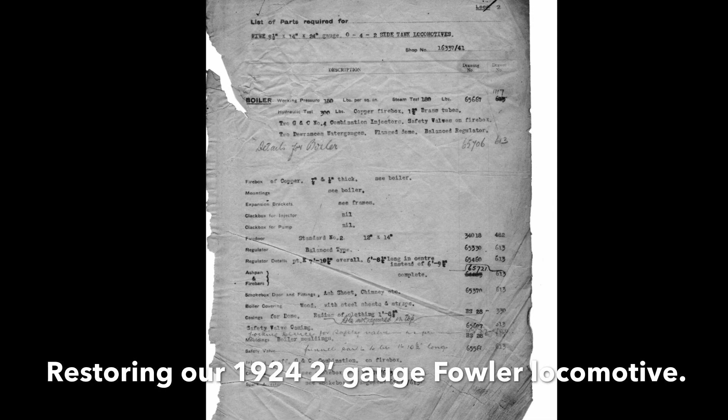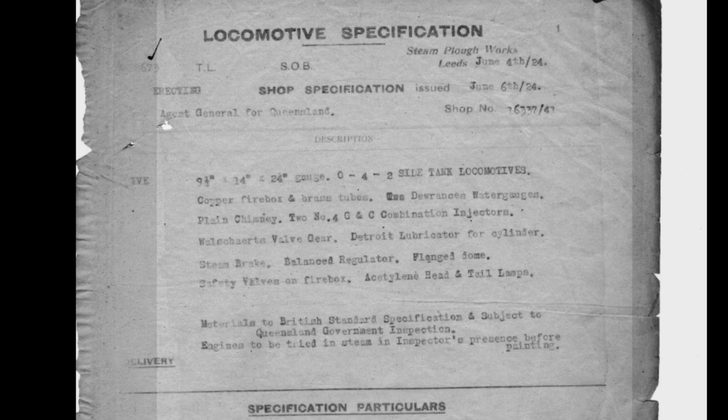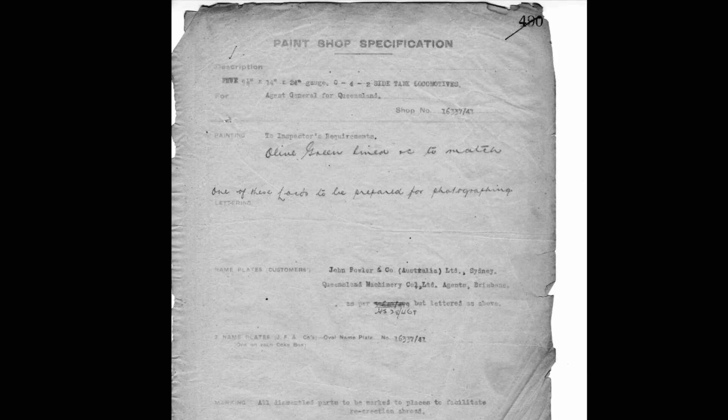These are really interesting - the original job spec sheets for our locomotive from the Fowler factory. You can see on the right hand side the batch number 16337 to 41, the batch of 5 locos for Tully Sugar Mill. It shows the order placed by the Agent General for Queensland on June 4th, 1924, and they're full of fascinating details - it says olive green lined to match, and one of these locos was to be prepared for photography, which we've seen with the works photograph of Tully number 2.

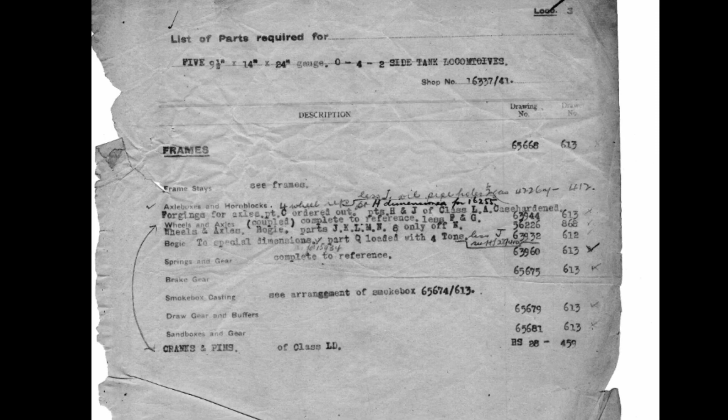They're an amazing find, kindly sent to us by Jonathan Palterman, who, when the Fowler factory was being demolished, went along with a friend in a van and loaded it up with all the stuff that would have been lost to history had they not made that effort.

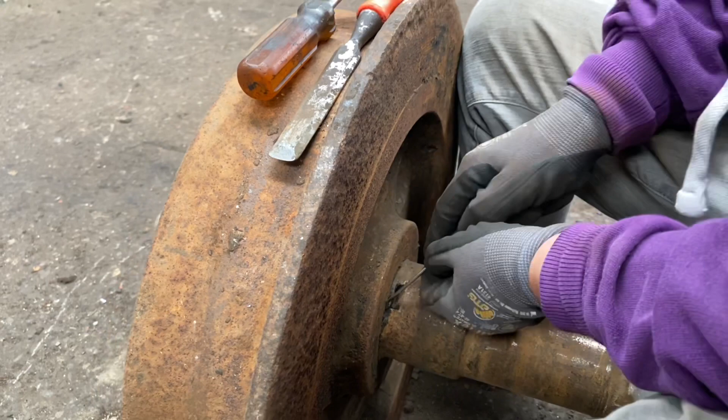The numbers on the right-hand side are the specific drawing numbers we used on our locomotives, so we know exactly how each part was made. The handwritten notes are from the actual workshop floor, showing what they did differently and why, on our individual loco. An invaluable part of its history, and we're really grateful to have received it.

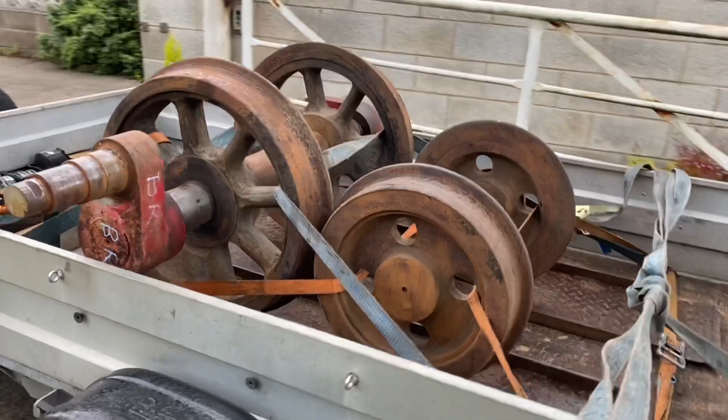So moving on to the engine, here's Jenny cleaning up the wheel sets, ready to go off to CMS Cepcor, essentially Bagley's Engineering as it's now called, where they've got much bigger lathes and much bigger kit than us to deal with them.

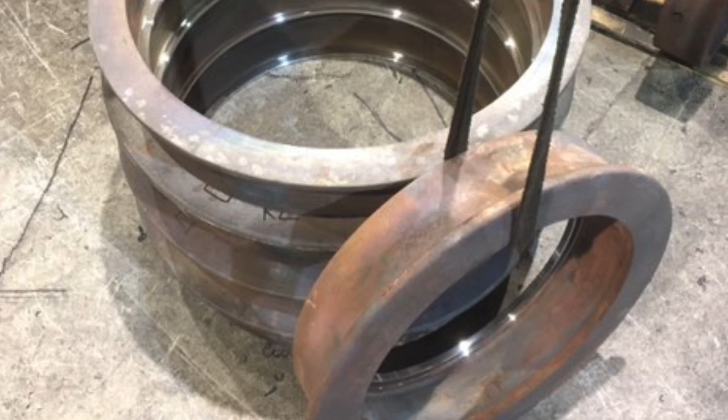The tyres were pressed off with a massive hydraulic ram to get them off the wheels for machining, as you can see here. They pressed off the fly cranks too - it took 120 tonnes to push these fly cranks off the end of our axle, quite a force we couldn't have done ourselves.

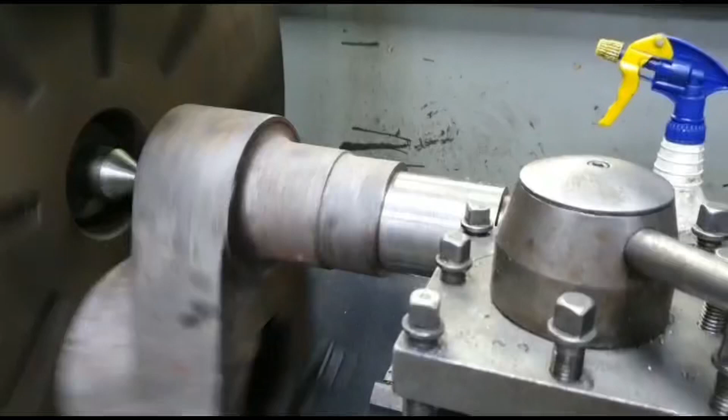You can see it balanced here on the lathe, with the crank pin running a little eccentrically - that's just because of wear on the actual pin. It's centralised properly, and we're machining it down, getting them all ready to go back on the engine. We'll send them back down to Setcorp, who will press them back onto the axles for us.

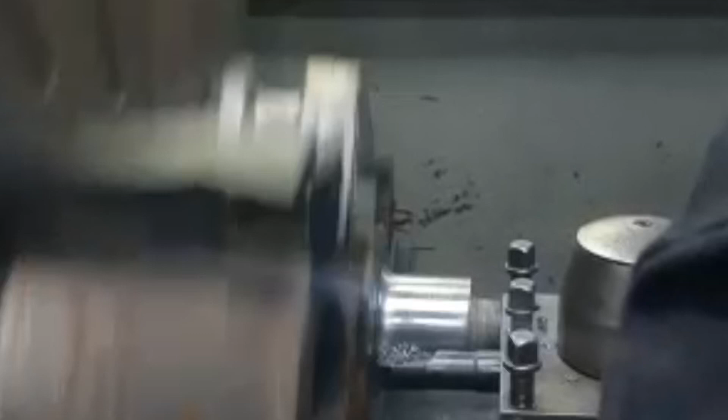We've got quite a lot of machine tools at the steam workshop, but some things are just a little too big for us to comfortably handle. Here's the fly cranks all ready to go back down to be pressed back on the axles again.

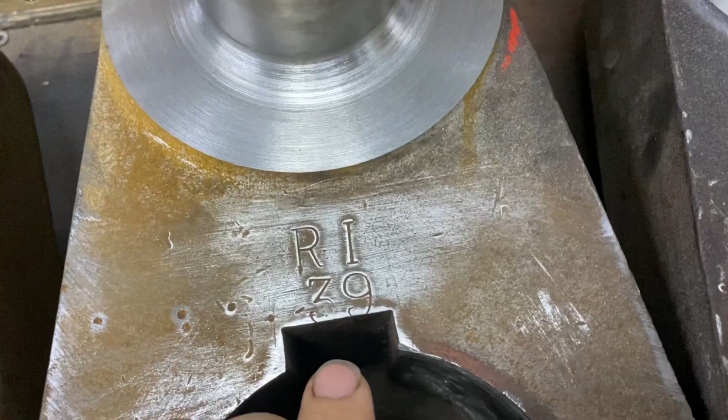Interestingly, they're marked up with 39 - that's 16339, which is Tully number 2, not Tully number 5. So they're not off our locomotive, they're off one of the others from the batch. The longer pins are obviously the driving crank axle, and the shorter ones are the coupled wheels, the front set.

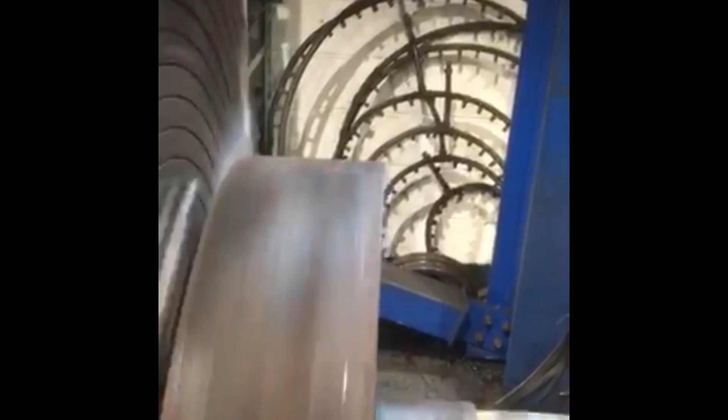The trailing pony truck here on the big lathe is clearly running very out of true - it's got a bent axle, as you can see. We've decided to treat that by skimming everything down to make everything square, so the only part of the wheel set that won't be true is the actual cast spokes. We don't think that'll have a significant impact on anything being out of balance.

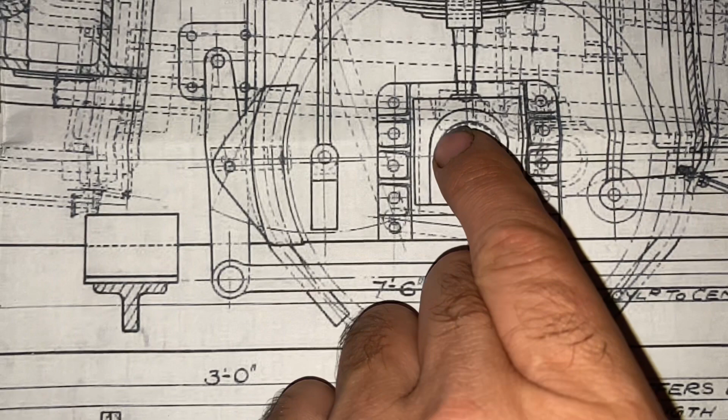Moving on now to the axle boxes in which the axle you've just seen runs. They're 3-part axle boxes - you can see the bottom part that holds the oil, the top part that retains the structure, and then there's a bronze shell that goes over the top that the axle actually bears upon.

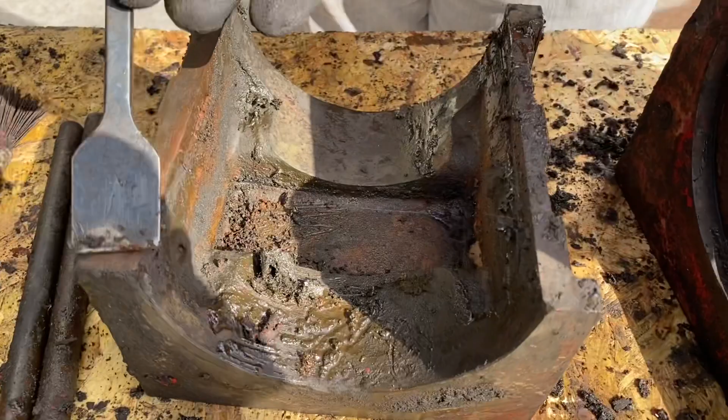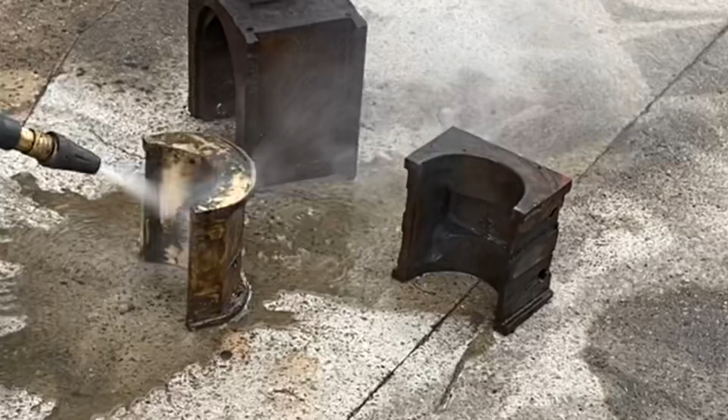In the real world they look like this. You can see Jenny cleaning the years of muck off the bottom part that holds the oil. The main part is there with the slippers on the side for the horn guides, which we'll come to later, and there's the bronze shell. We then cleaned all the muck off so we could see the wood for the trees, so we can make assessments on what we need to repair.

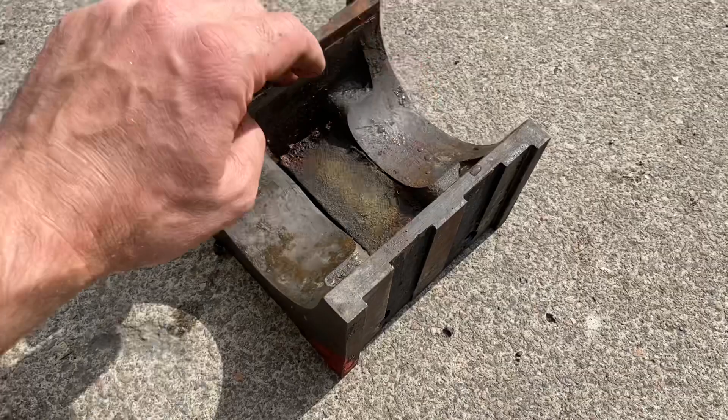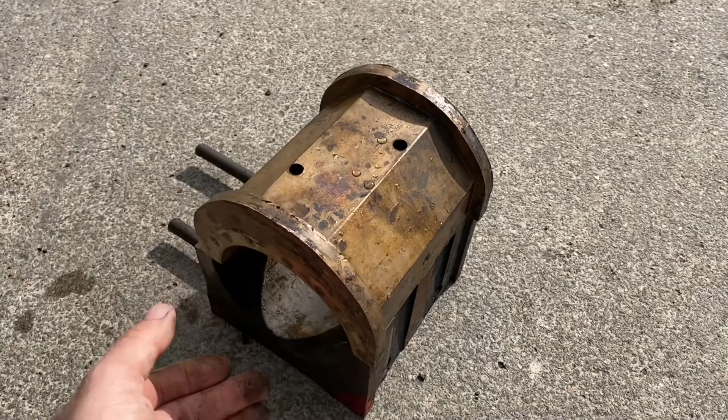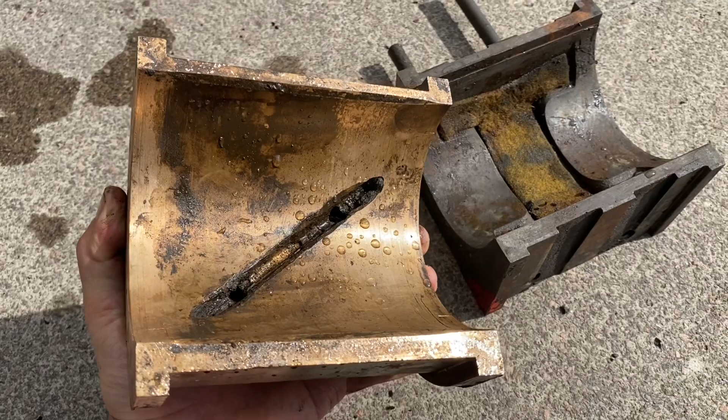The oil retainer at the bottom is like this - it has a space for a felt that holds the bulk of the oil, and another felt that sits up in an arch and touches the underside of the axle, keeping oil smeared on the axle as it rotates. The bronze then sits over the top, and the axle bears upon that. At the top there are 2 holes which, when the axle box sits over the top, allow oil to filter through from the reservoirs into the slot and onto the axle itself, to make sure it's continually lubricated.

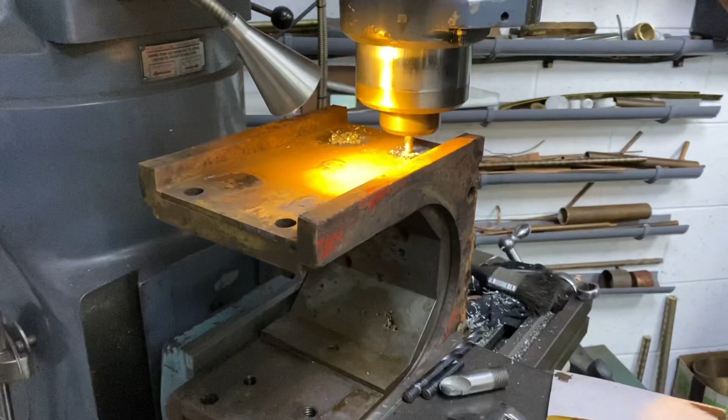Now, at some point the axle boxes themselves have got so worn at Tully Sugar Mill in the horn guides that they've needed extra pieces of metal put in there to build them out again.

That's what you can see there. They're all worn and pitted as well, so we're removing them. We're having to drill out the countersunk screws that are holding them in, because they were so rusted in that we couldn't shift them any other way.

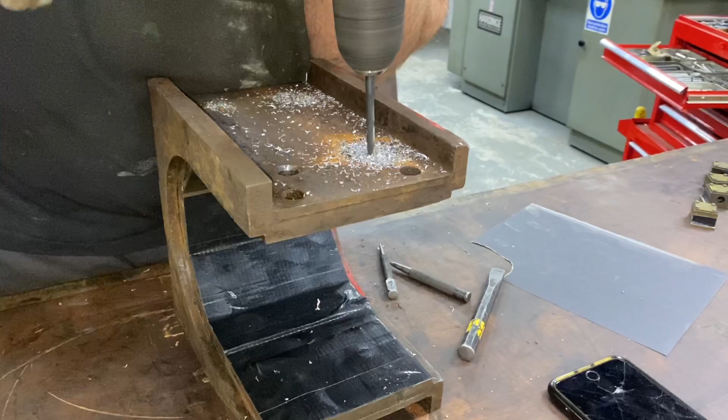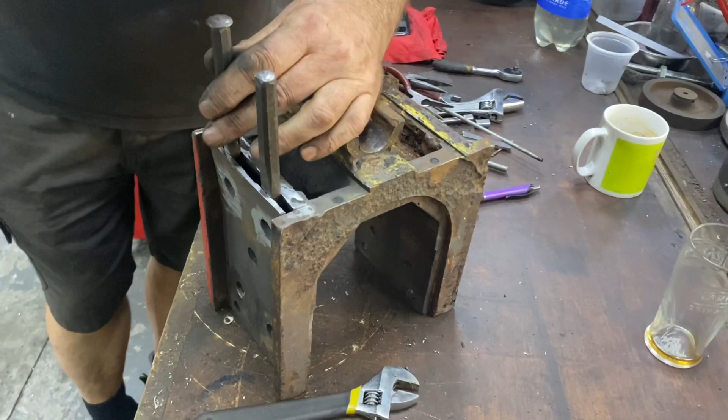So we're drilling through the screws in this bit of film, and then we're going to prise and pull that part of metal off so that we can make brand new ones, which will be oversized, and then machine those pieces back down to fit exactly where we want them in the new horn guides. You can also see here the surface of the axle box is incredibly pitted.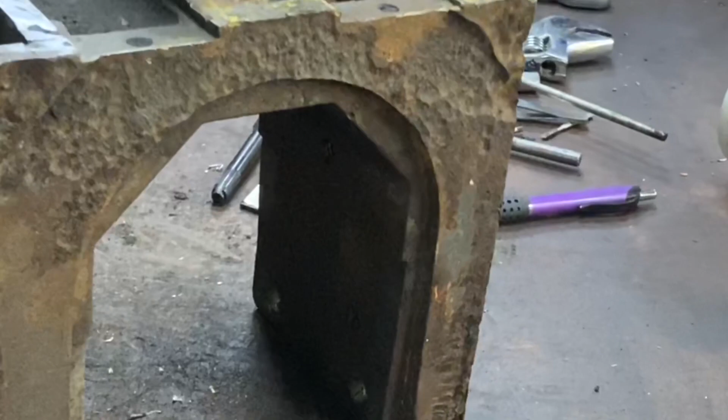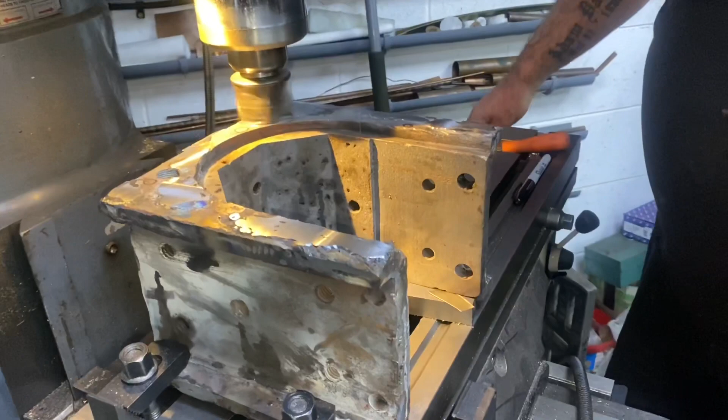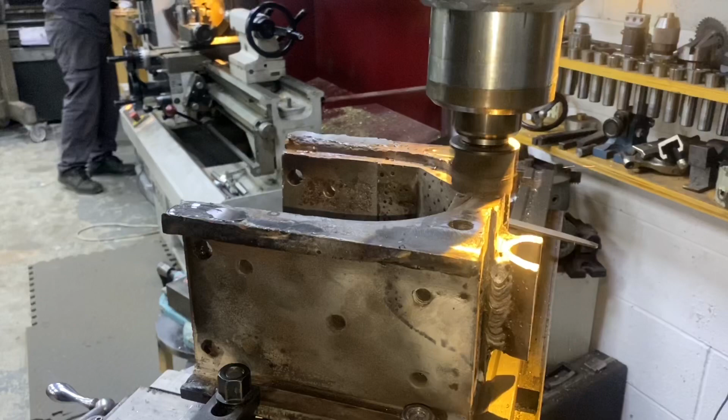It's a steel box, but it's all rusted away. We don't want to use new boxes, we wanted to use the original parts. So we've filled all of that rust and deterioration with weld. We've welded it up so it's an oversized surface, and then here we're milling it back to the correct size with the milling machine, to get it back to a fresh, perfect surface to the drawings of what it should actually be, and what it would have been before the rust and the wear.

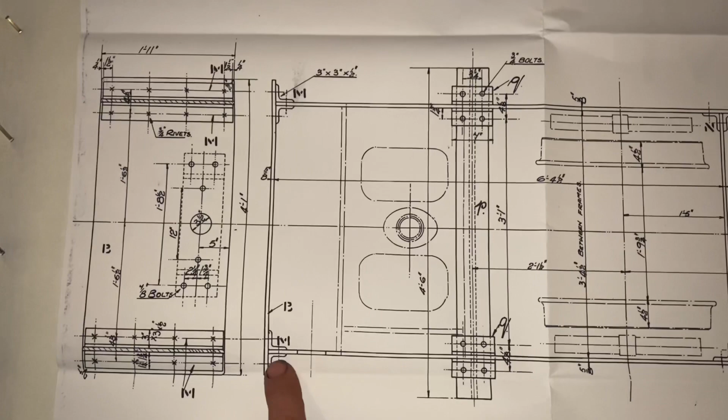Moving on to the frames, this is an interesting part of the project. That's the front buffer beam. And the line that I'm tracing with my finger now shows where we've found a big kink in the frames. On the right hand side, this is the plan view looking down from the top, and on the left hand side. The loco's obviously had a very heavy front end impact at some point in its life, and it's really bent the frames. You can see that line I traced on the drawing there with the black line down it.

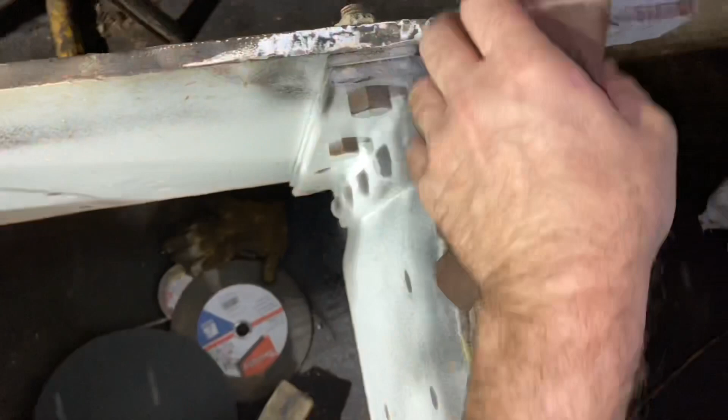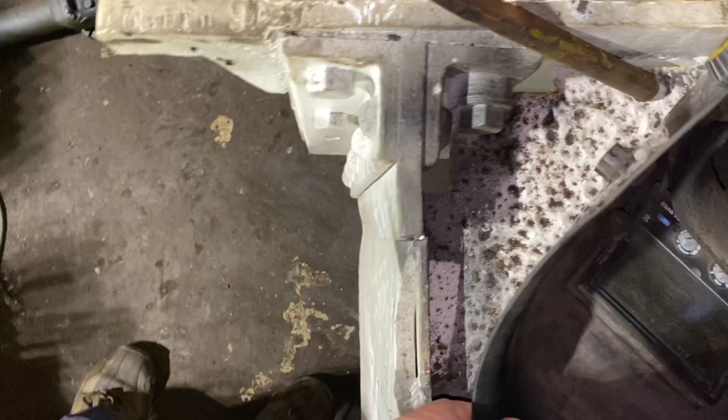And when we go over and look down from the top, once I move the glove, you'll be able to see that it's very badly kinked over to the right hand side. We obviously need them to be straight. Same story on the left hand side here, and you can see that there's quite a thick wedge in behind the front buffer beam and the angles of where it's all bent.

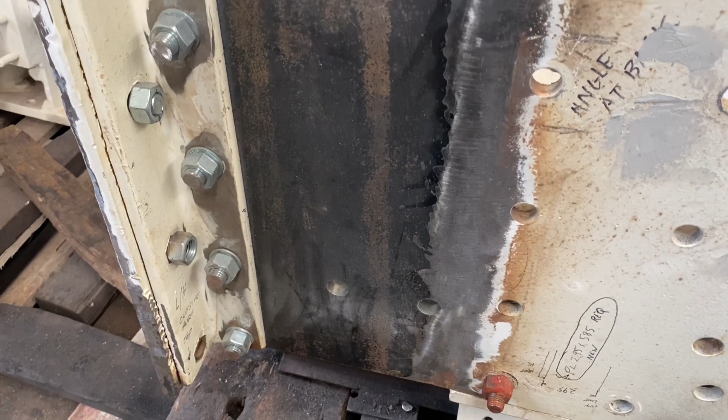We needed to chop that section out along those lines and weld in, as you see here, a brand new section of plate at the front end. We did consider heating it up and putting long arms on it to try and bend it square, but ultimately we decided that would be quite a difficult thing to practically achieve in the real world, and this was the most sensible solution.

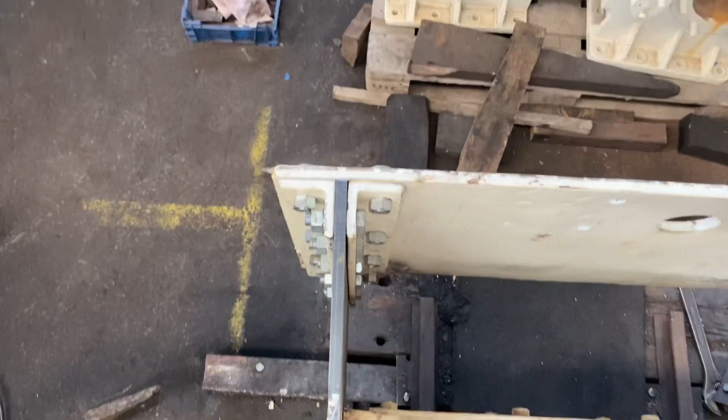Looking from the top, you can see it's now much squarer, although we've still got some work to do there on straightening the buffer beam itself and the angles.

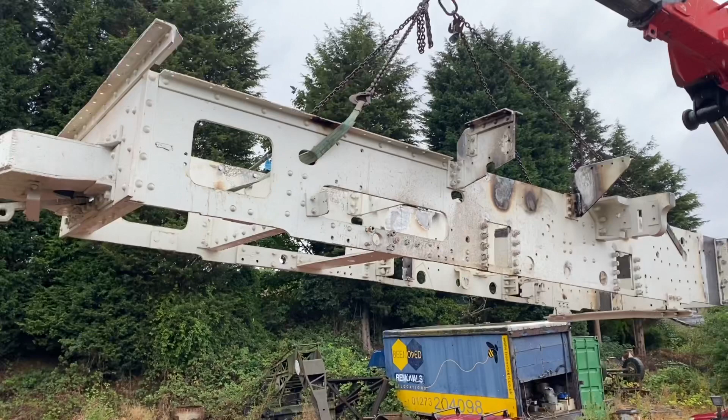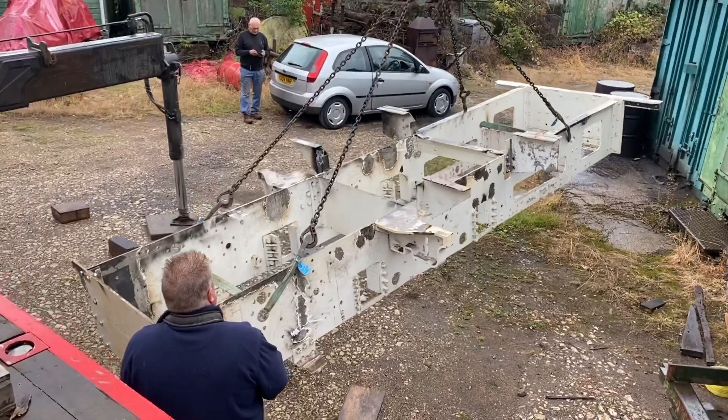This is the frames now returning back from the welders and the fabricators and the shot blasters, ultimately back to the workshop, where we can really start to get them set up and sort everything ready for the wheel sets and axle boxes to go back in again. They look a bit scruffy because of all the welding work and repair work that's been done to them.

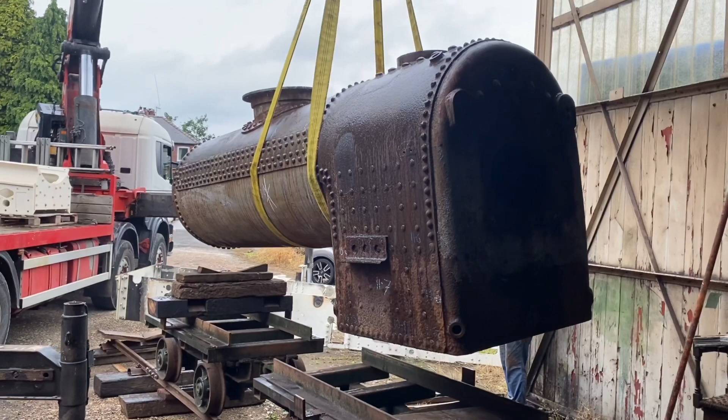The boiler, then, now empty of its tubes, as you've seen in a previous video, was loaded up onto the same lorry and taken away for shot blasting, so that that too is clean metal, and we can see the wood for the trees and get a professional boiler inspector in to assess it and give us his view.

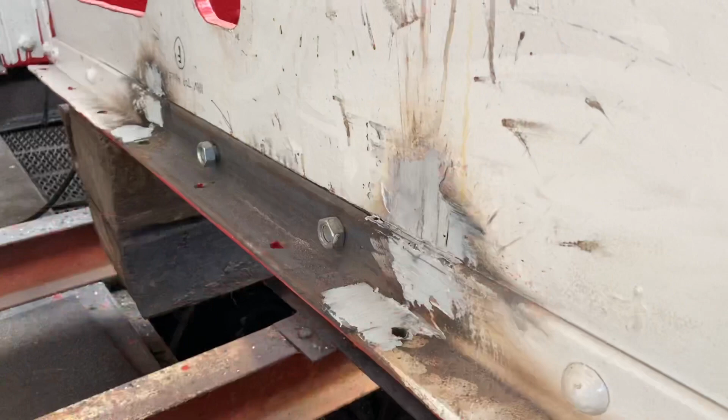This is the frames in the workshop, and we've started to replace materials. There was a badly rusted part of angle iron there which we've chopped out, and the same here, replaced with new where and when we've had to, retaining the original when we've been able to.

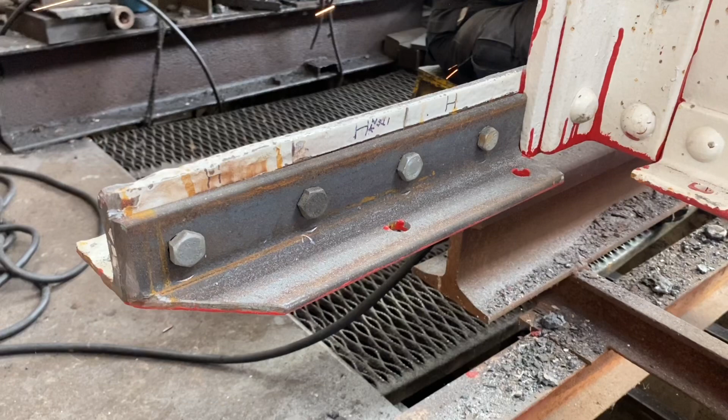Here, this is the rear buffer beam. You can see it's very badly pitted, and again our approach has been to fill those pits with weld to build up that surface and replace it with new material.

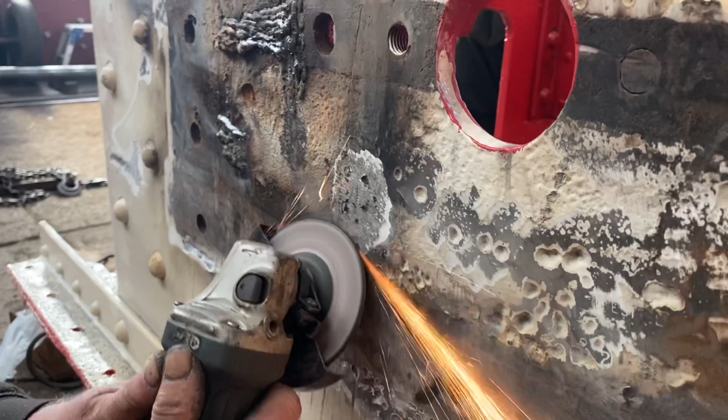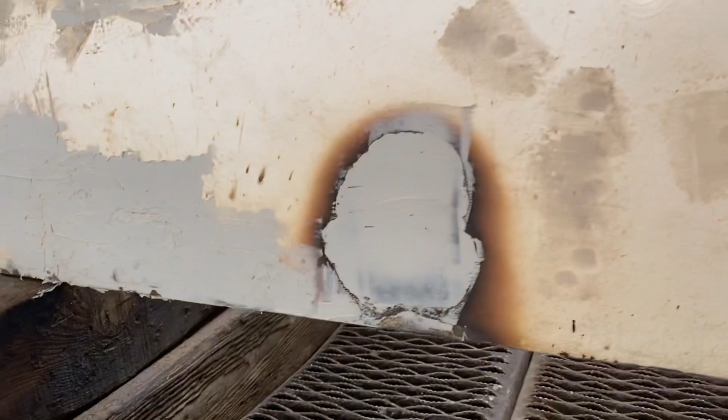The welding isn't brilliant, but it's going to get angle ground off anyway, back to flat metal. That's what Dave's doing here, angle grinding off my rubbish welds to get it back to a nice smooth finish. The little bits of pitting left can then be filled with filler or paint and sanded back. We're not looking for a beautifully glass smooth finish here because it's a 100-year-old steam locomotive, but what we don't want is a weakness in the material where it's thinned to a point that causes structural problems.

Here you can see where the cracks have been welded, and from the cracks in the horn guides, they've been welded up, sanded back, and then filled to make them smooth.

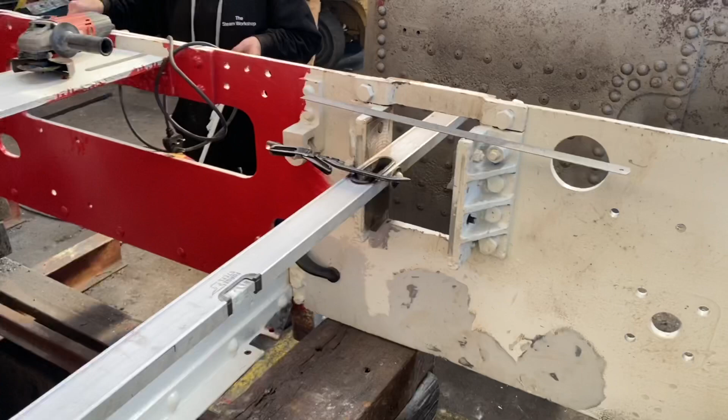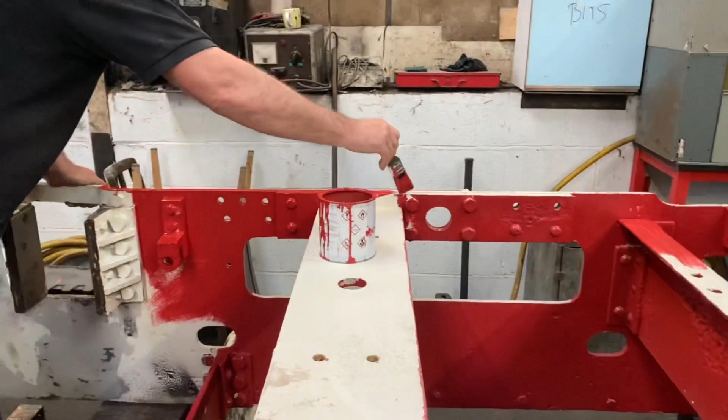You can also see we've got a couple of straight edges clamped to the horn guides. The horn guides have been cleaned up basically so that we could get these straight edges across to give us some sort of datum that we can take measurements from.

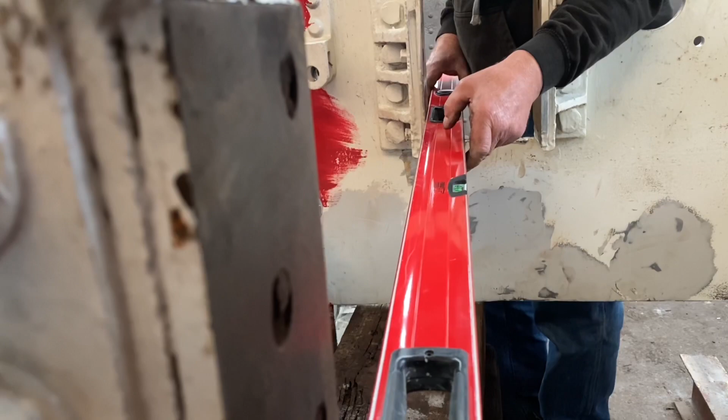It's important at this stage to find out what's square and what's not with the frames and the horn guides, so we can decide what needs machining away and what needs replacing, so that when the axle boxes are ready and the wheel sets come back, we can get them all in the correct orientation and have them square and true.

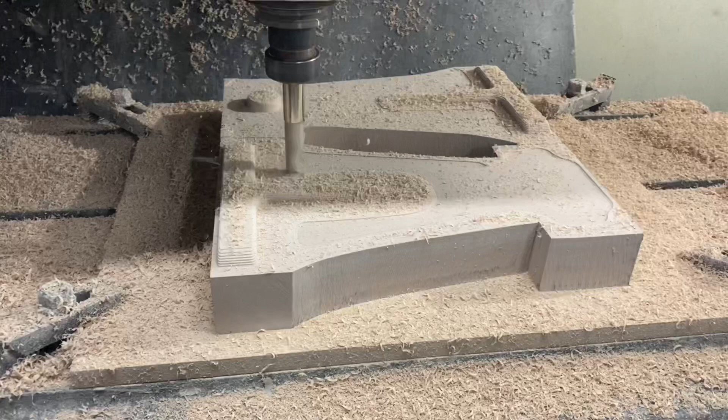So moving on to a new part of the video now. This is machining a pattern for the valve gear motion bracket, a part you might remember we looked at earlier on in an earlier video because it was fractured.

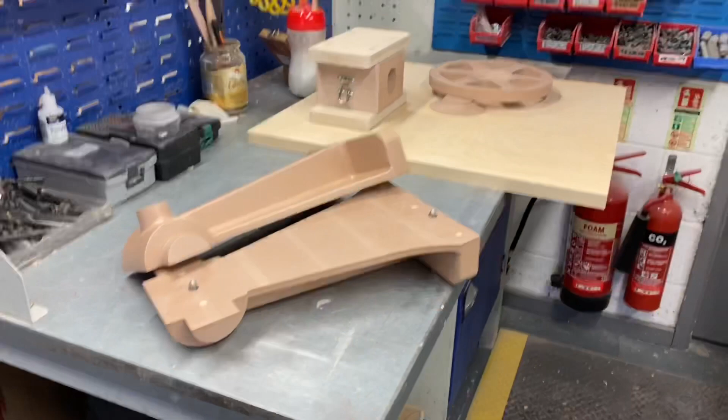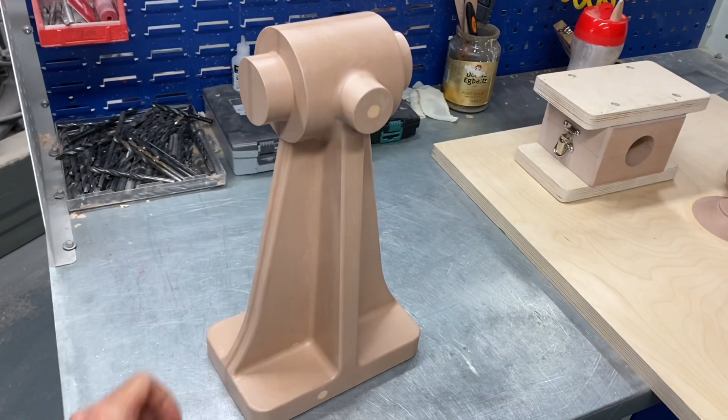This is the pattern finished and lacquered, ready to be put in the sand to make new castings. You can see the lugs sticking out either side are for the core print, and the box on the right hand side is to create the sand core that goes in there, ultimately to create the hole in the casting itself when it comes out from the sand.

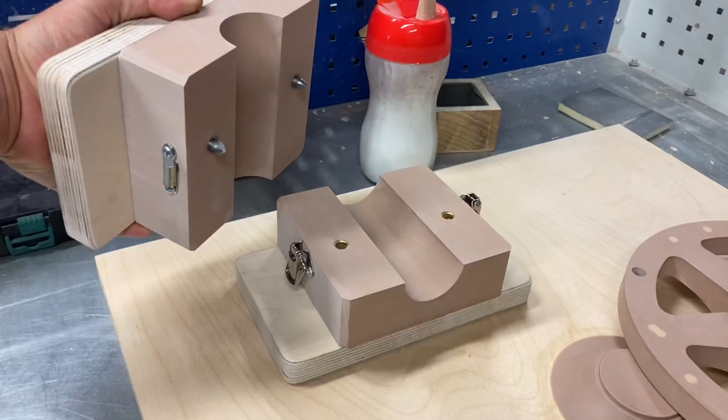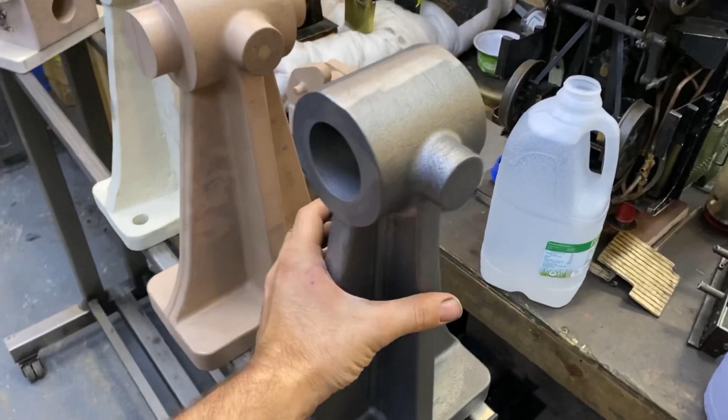Here you see the original part we've got, on the left hand side, which we scanned in to digitize the data, from which we made the pattern and then from which was made the casting. The new casting obviously now needs machining, but it's certainly a lovely piece of metal to start with.

Moving on now to another new part. You may remember from an earlier video, the top gauge glass fittings are handed - there's a left-hand one and a mirror image on the right hand. Now, we only had the right-hand one; the left-hand one had gone missing at some point.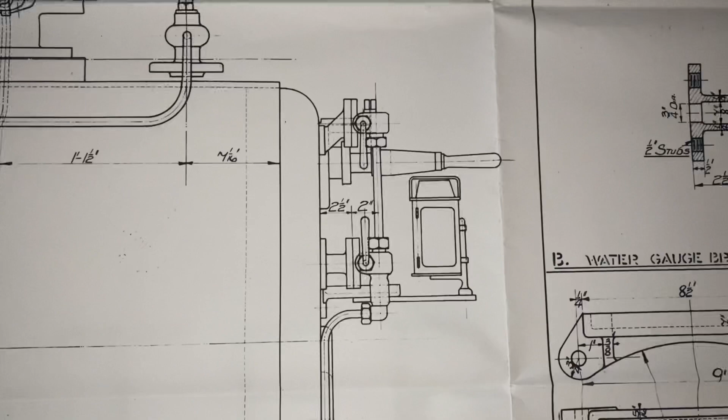So again, we did exactly the same thing. We took the one that we had, the right-hand one, placed little dots on it and digitally scanned it in, from which a computer-generated model was created.

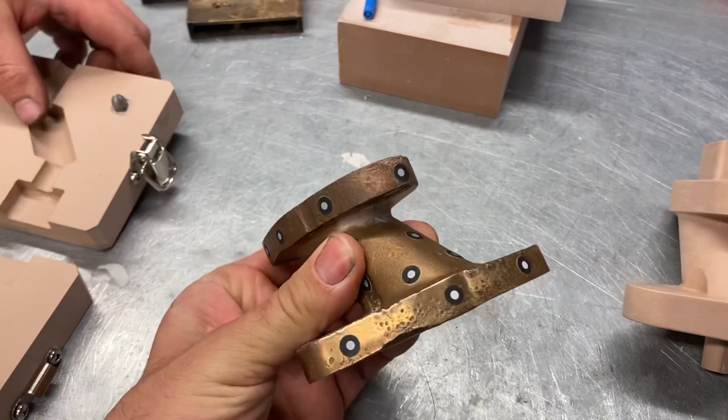We then flipped that model through the horizontal plane to create a left-handed version of exactly the part, and then the pattern was machined in the same way that you saw earlier on the CNC machine, as well as a core pattern to create the holes down the centre of that piece.

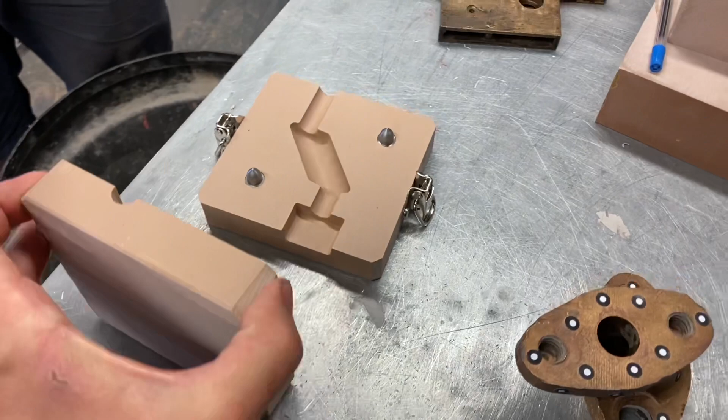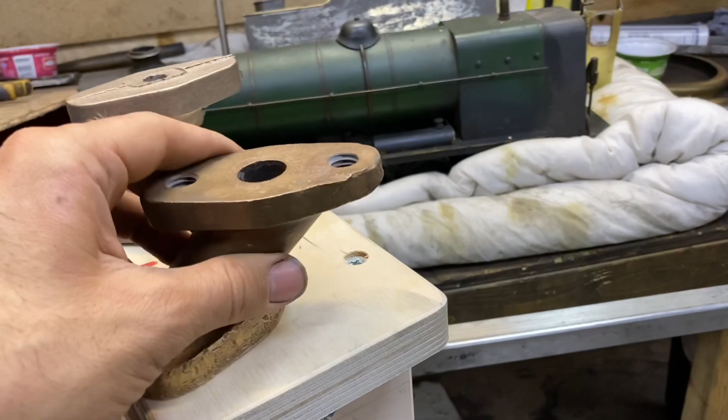And then a casting was made of it, shown here on the left-hand side. This is the two of them, the original and the new casting on the left. The new one needs to be machined up, but certainly, again, it's exactly right.

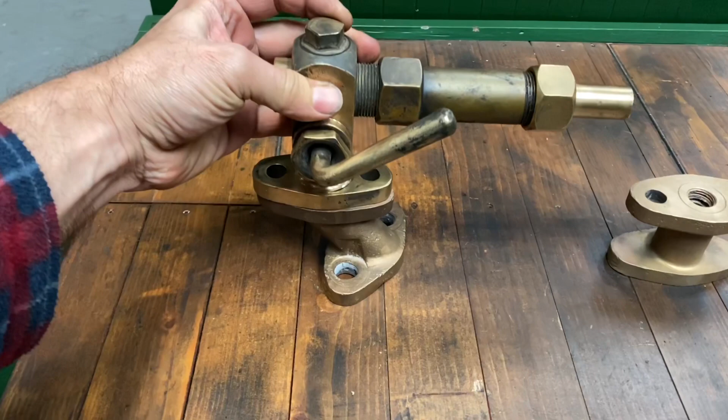It's made from a scan of the original part, and it's a part we were unlikely to be able to source an original of from anywhere else. We have, however, been lucky enough to source many original parts so far, and we're still on the lookout for as many as we can find to get the locomotive as accurate as possible.

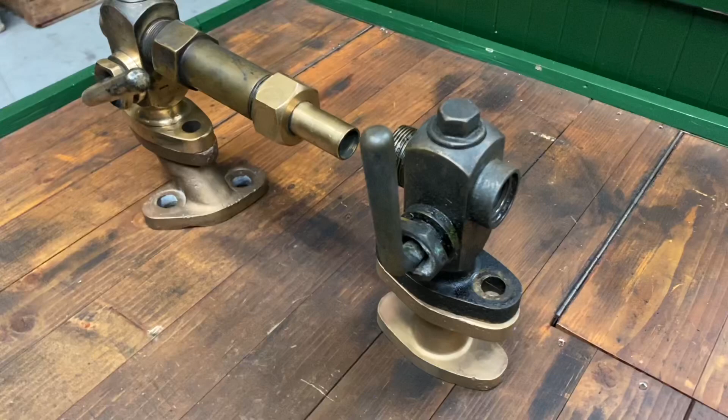These are original Dewrance gauge glass fittings as fitted to our locomotive, on those job sheets you saw at the beginning. They're contemporary - they've come off a 1920s Fowler from a friend of ours and a customer, Stephen, and we're very grateful for him letting us have them.

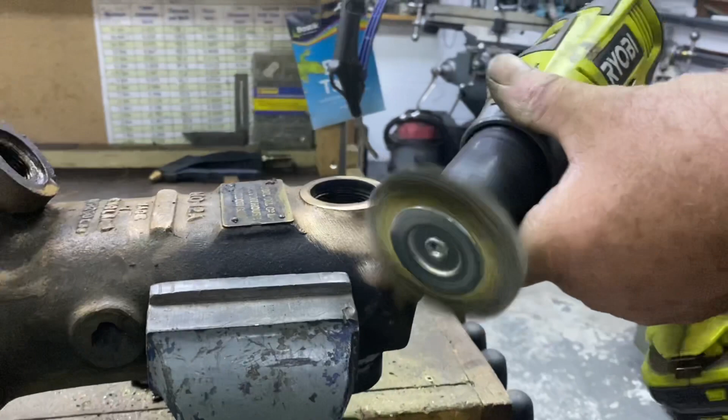Another part we've managed to source for the locomotive here is a Detroit lubricator. It's actually a little bit more of a modern version than would have been originally fitted to our locomotive, and it's sort of the next size up, so it holds more oil, which in this case is probably a useful compromise for us to make.

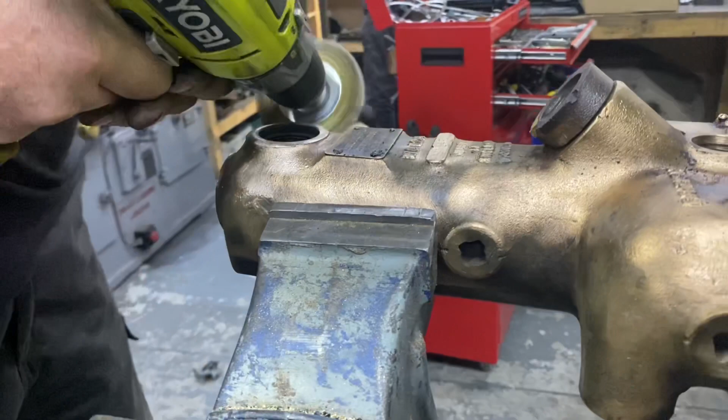You can see Dave cleaning it up with a wire brush, and it's coming up really nicely. All of the actual mechanical parts have obviously been stripped down at this stage and will be repaired or replaced as necessary. This is Dave cleaning up the open and shut label that goes on the main valve, and that part should clean up nicely, as you'll see over the next few seconds in the video.

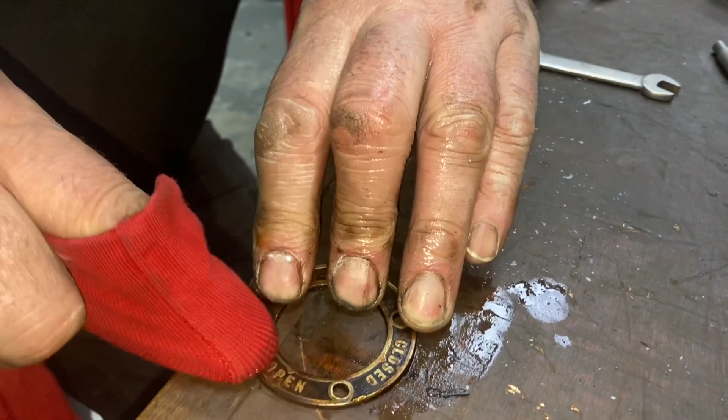And moving on to the last part of today's video, another new bit for the loco. This is a pattern for the cylinder drain cocks. We couldn't find any originals, so we borrowed the pattern from another preservation group, Core Box as well, and we made a bunch of new castings, which we will be machining up in a subsequent video.